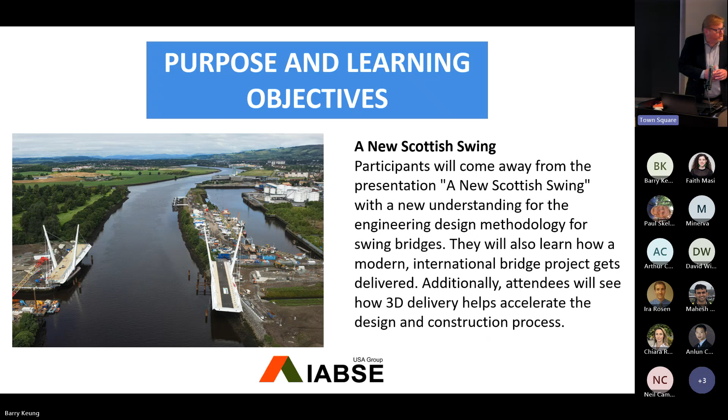Yeah. All right. Thank you, Paul, for the introduction. Welcome, everybody. My name is Barry. I'll be going over the new Renfrew Bridge here. It's set to open end of this year in Scotland, and I'll walk you through all the phases of the project.

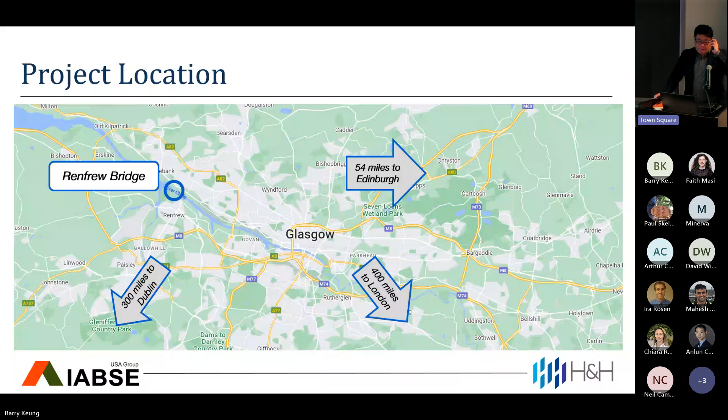So the project location is just west of Glasgow in Scotland. It's about 400 miles to London, 300 miles to Dublin, pretty close to Edinburgh. It's a small little hamlet suburb of Glasgow itself.

This project is part of a larger waterfront renewal, like a lot of new infrastructure projects. So there's roads leading up to the bridge itself, and then housing and redevelopment. Currently, this area of Glasgow is pretty industrial, so with those trades kind of being refreshed to more modern schemes, it's all converted over to housing, kind of expanding the neighborhood of Glasgow itself.

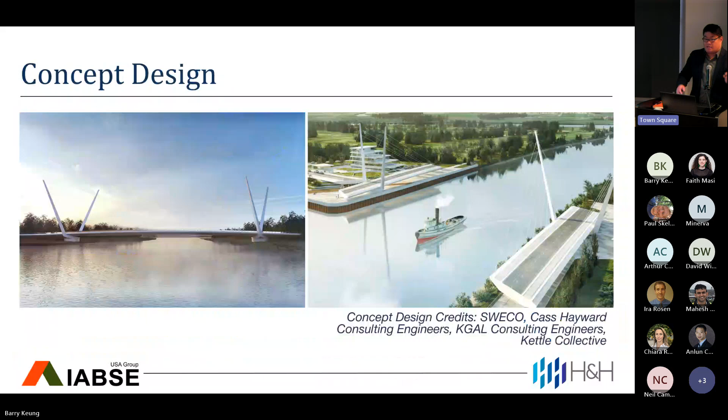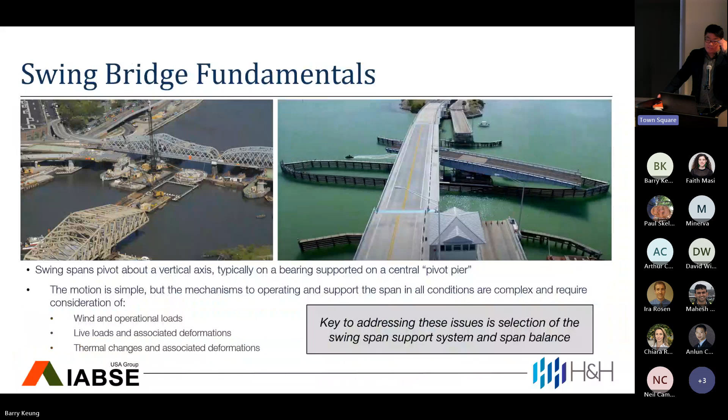Taking a step back, I should describe what a swing bridge actually is. Typically swing bridges are single leaves - a bridge that pivots about a center pier and rotates to allow navigable traffic, then returns itself back to center to allow vehicular traffic. Simple motion, but there are a lot of considerations: wind and operational loads, thermal changes, and things like that. These are all very important factors in determining the support systems for swing bridges.

For our bridge, we doubled everything, so we have a double leaf cable stayed swing bridge. Underneath, we support it under two pivot piers with a slewing bearing. At the abutments, we have end jacks or wedges, and a nose lock which engages the mating span so there's continuous load transfer as you drive over the abutment, over the channel, and back over to the next abutment. A lot of things working in play, but a very complex structure.

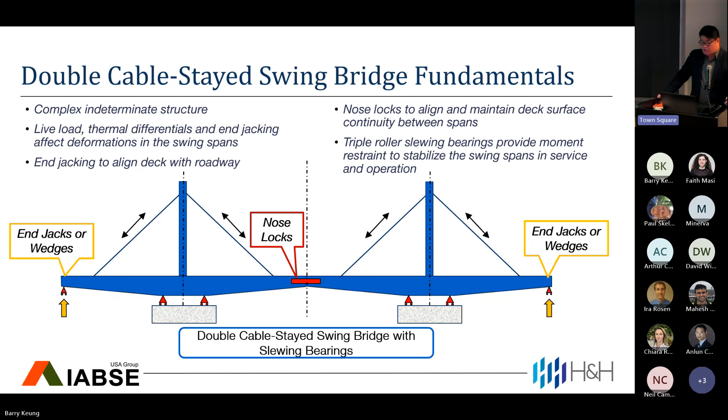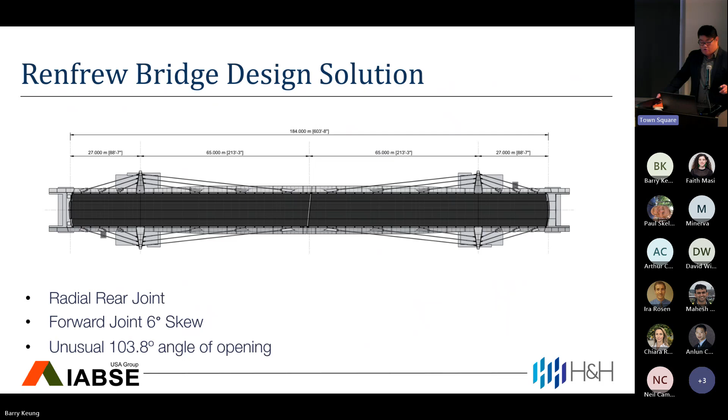Our solution was a value engineering alternative from the original concept design. We reduced the skew of the pylons to just orthogonal - straight 90 degrees with the roadway. We also reduced the toe joint to 6 degrees rather than, I think, 18 degrees originally. That ensured equal loading between the mating girders left and right. We also had a radial joint. With the slight skew at the nose and the radial joint at the rear, we're able to rotate the bridges freely and operate independently. We do have an unusual 103-degree angle of opening, which I'll get into more a little bit later.

So for our superstructure solution, it was a double leaf bobtail cable stay swing bridge. We reduced the number of stays, I believe, from 10 to 6. You can kind of see everything here.

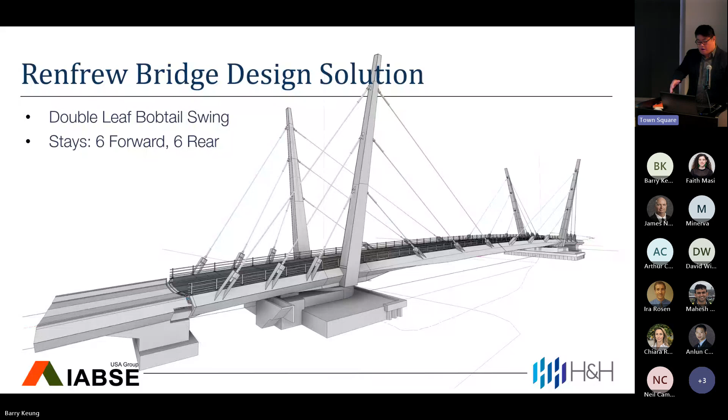Something Paul mentioned earlier is that we designed the entire bridge in 3D. So the renderings you see here are not made just for renderings - they are made for our contract drawings, then rendered for presentations and videos, and sent on to their next life on the contractor's end. This was our engineering model in CAD, which was translated to the owner to make their own renderings. And this is what the bridge looks like this week.

Overall, the design team was led by Graham Constructors, who were the GC. Ramboll Engineers were hired as the approach design engineers for the civil works and substructure. The entire swing span superstructure and machinery was subcontracted out to what we call the HIJV swing span team - a joint venture between Hollandia Infra out of Rotterdam, Holland, and Iemants Smulders, based out of Antwerp, Belgium. Hollandia manufactured the South Leaf, Iemants manufactured the North Leaf, and then they hired us - another JV of us, Hardesty & Hanover, and Roughan & O'Donovan out of Ireland - to design the swing span superstructure and operating machinery.

So a lot of geography at play here: UK, Holland, Belgium, Tampa, Philadelphia, New York, London, Dublin Ireland, and Australia. A lot of moving pieces, so it was very helpful for us to design everything in 3D.

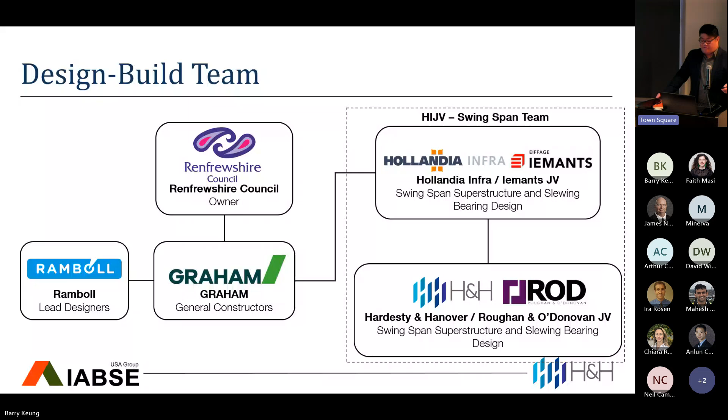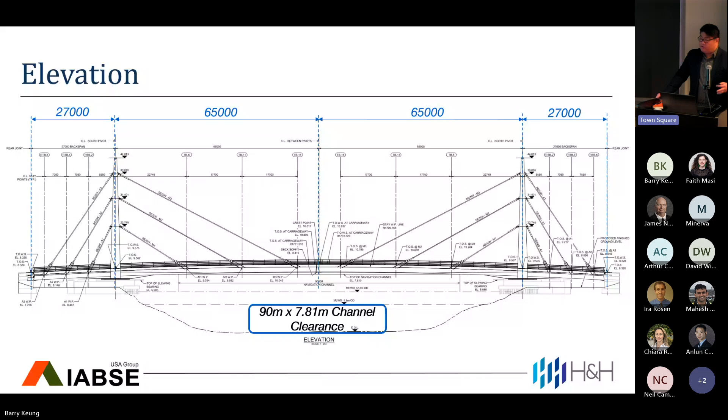This is our bridge typical elevation. We have a 27-meter backspan, 65-meter forward span. When the bridge is closed, it's a 90 by 7-meter navigational clearance. When the bridge is wide open, it's 90 meters by unlimited navigational clearance.

By leveraging cable stay systems and the orthotropic deck, we were able to keep the structure very lightweight, which also meant we could make it very long. That brought more problems we don't normally encounter, such as aeroelastic stability. So this bridge needed wind fairings and drainage - things we don't typically consider when designing a movable bridge.

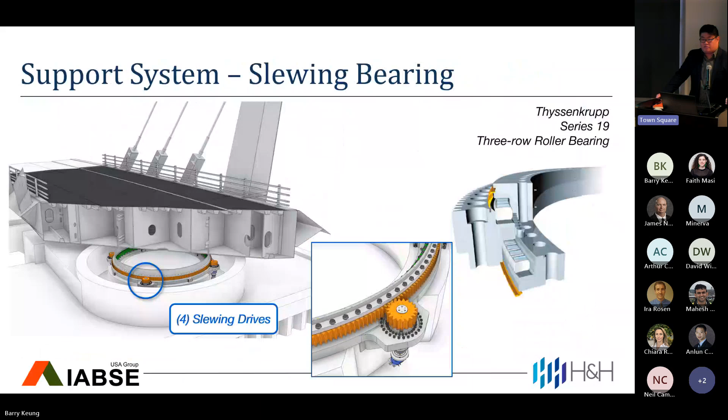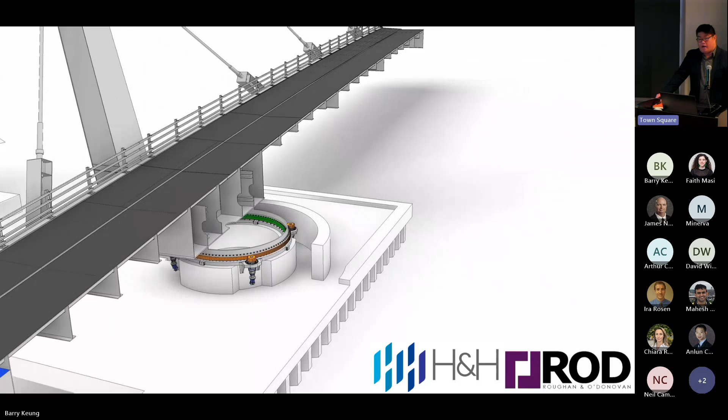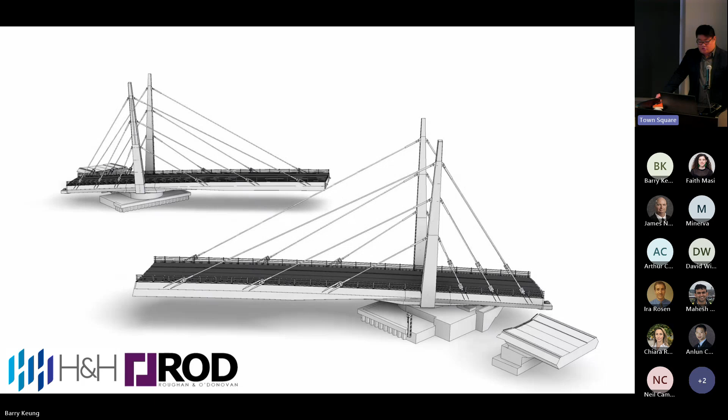This is what the bridge looks like in section, in operation. You can see the slewing bearing is attached to the bridge superstructure itself, split between the fixed part and the moving part. The bridge is actually operated by 4 pinions run by hydraulic motors attached to the pivot pier itself, and they are electronically synchronized in order to operate the bridge. So when everything works right, you've got 2 bridges moving in unison, letting navigable traffic get through.

So for support at the nose and the tail end, we have a nose lock and tail wedges. The nose lock actually retracts and extends in order to engage the mating span. And at the abutment, a tail wedge engages with a receiver on the abutment side to make sure that we have positive contact and load transfer from the substructure to the superstructure.

We'll also notice that the wedge actually provides vertical translation as well, so as we're retracting or extending the wedge, we're lowering the superstructure. This is so that we have proper clearances when we're operating the bridge so that we're not running into any static fixed structure. So this is everything at the rear joint.

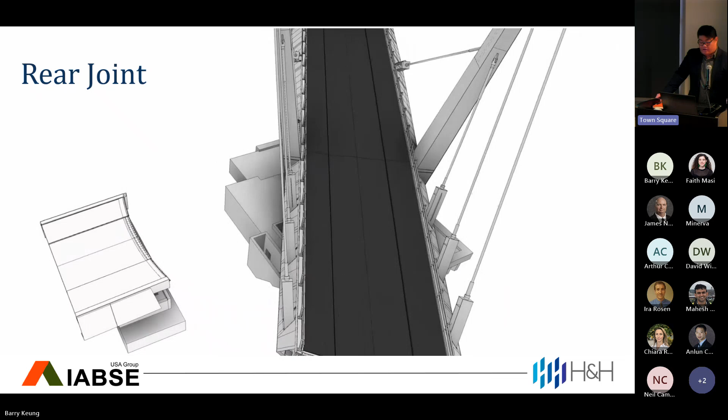There's a lot of staggering and equipment and stuff that we had to coordinate here, so it's very helpful to work in 3D.

Okay, so this is an anecdote time.

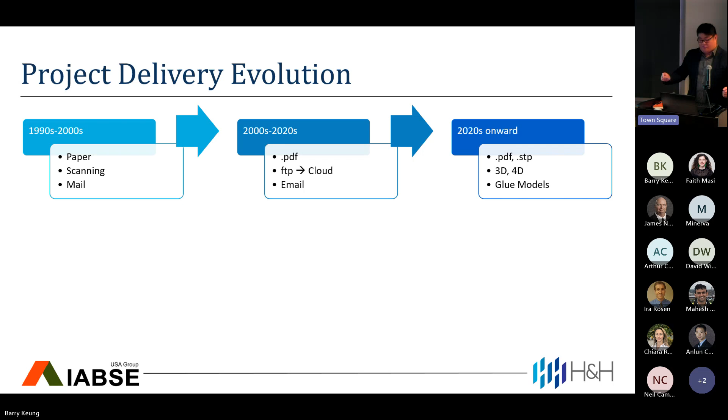When I first started working here, there was a guy who was a year ahead of me. His entire job here was to scan full-size drawings that were 32 inches wide, marked up by another engineer and highlighted in red. So he was supposed to receive those by mail, get them reviewed, scan them for record keeping, log them into Lotus Notes, wrap them all up and package them and physically mail them back to whoever made the shop drawing.

My first job here was on one of New York City's largest movable bridge projects at the time. And we estimated that we were going to get 10,000 shop drawings, and I was going to be the facilitator for that. And I asked, do I need to look for another job? Because there's no way I'm scanning 10,000 shop drawings.

So for that project, it was 2006. We were able to get New York City DOT to accept the electronic delivery of CDs for a bridge in whole. So this is the first real big step of moving into a modern era of delivery. We're able to use email. At the time, we loved email, not so much now.

FTPs and PDFs to submit all the shop drawings. And since then, the delivery hasn't evolved that much. We have cloud systems, email's gotten worse. Things got more expensive, but pretty much there hasn't been much evolution in those 20 years since then.

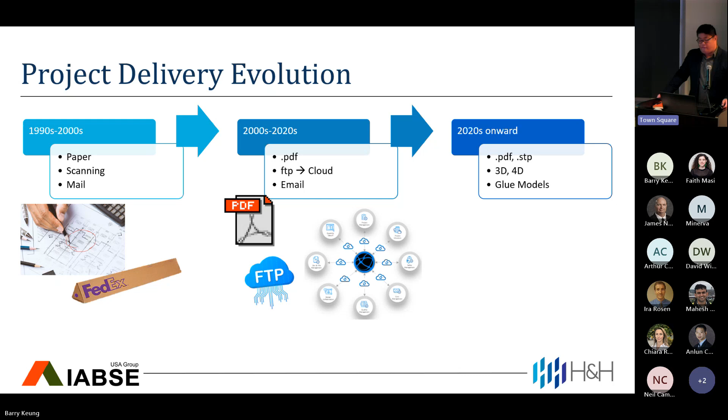Starting in the last 5 years, we've kind of stepped it up a lot. PDFs are still our contract deliverable, but to make those PDFs, we're making 3D models, and we're actually submitting agnostic step files as well, in order to make sure that there's additional information. We're still...

obligated for all the information that is on the 2D contract drawings. The 3D drawings are submitted as a sort of design assist for translating information. It cuts out a lot of RFIs, miscommunication, things like that. And since this was a design build project, it actually helped with execution a lot.

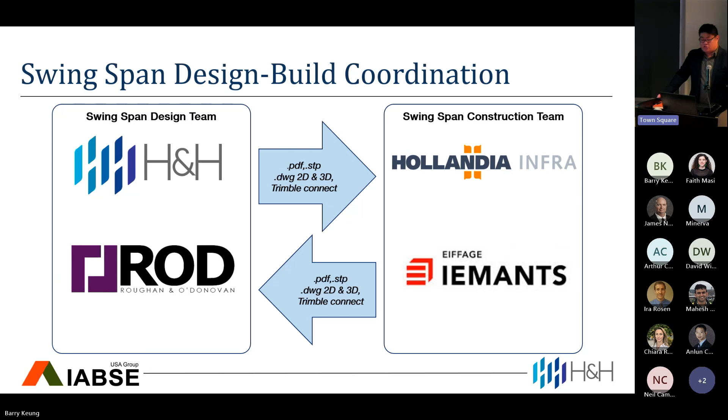So this is the coordination within the Swingspan design team. We submitted our drawings, step files, traditional AutoCAD 2D and 3D, and Trimble Connect, which is a web-based viewer for 3D models. That was submitted to the contractor. The contractor was able to digest that, send back information in a similar fashion so we can kind of coordinate everything.

So the big benefit of doing all of this is that once we were at 60 to 70%, we could submit the models to the contractor and they can make their prefabrication method statements. So they can start in earnest figuring out how they want to fabricate the bridge before we were done with final engineering, which saved on a lot of rework.

They did so much work in 3D that we were able to make sure that the manholes and conduits were bent to the right dimensions before we even delivered the bridge at all. So all of this bending that you see here was included in the 3D model that the fabricator was creating.

This is very important because on orthotropic decks, there's a lot of hotspots, very controlled geometry based on the Eurocode. So it's important that we were able to translate all of that. So the contractor, all this process greatly reduced the amount of traditional time that we have for shop drawing checks, since we're basically making our drawings from the same 3D model.

Also, the cable stay geometry is very complicated and very difficult to digest in a 2D drawing. You can see here, we have a lot of the different angles and coordinates laid out in isometric and plain 2D, and it does get very complicated.

And because we were so concerned about secondary effects within the tie plates at the pylon, it's very helpful for us to actually have a 3D model to send over to the contractor to make sure that we were both understanding the geometry as it was intended.

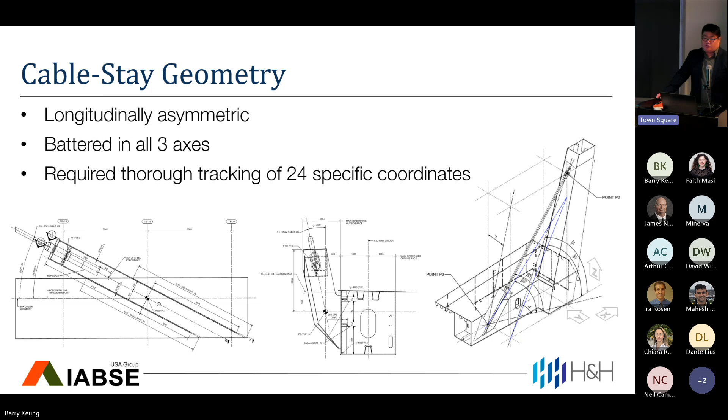Additionally, the contractor was able to do all of their work plans in 3D using our model. Originally we had double fillet welds for welding the superstructure for the pylon. At the lower portions there was enough accessibility for welders to get in and do the internal double fillet welds. Once we get up to the green and blue section up top, it gets really tight and they weren't able to get anybody in there, so we had to redesign some of those areas to partial penetration welds just to facilitate fabrication.

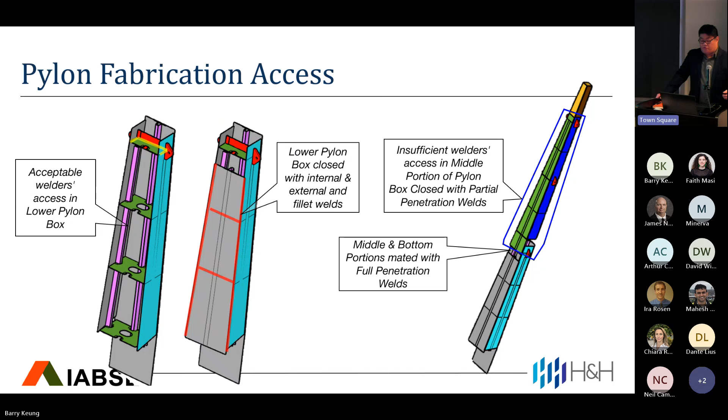But we were able to catch that very early on because everyone was digesting a 3D model. So this is some shots of the fabrication there. You can see there's a guy further back in the pylon, a lot of access there, but it does get very tight as we get closer to the top.

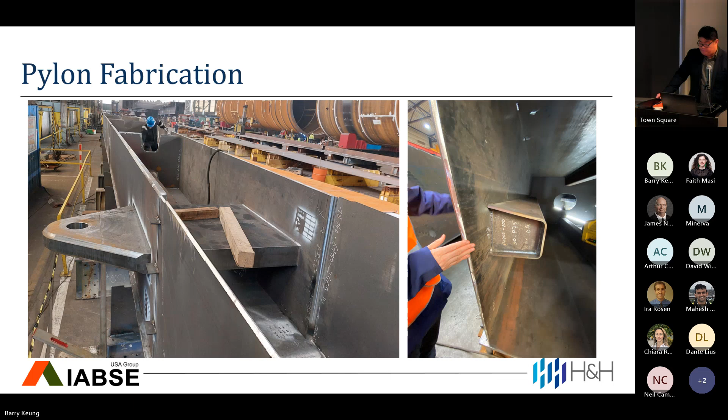Another important part of doing a cable stay bridge and a bridge this long is that we're very concerned with deflections. Traditionally on a bridge here in the States, things are bolted, so you have some slop in connections to do final alignment of superstructure and machinery. This, because everything was done offsite, we don't have that many chances because everything is welded. You kind of have to take it how it is.

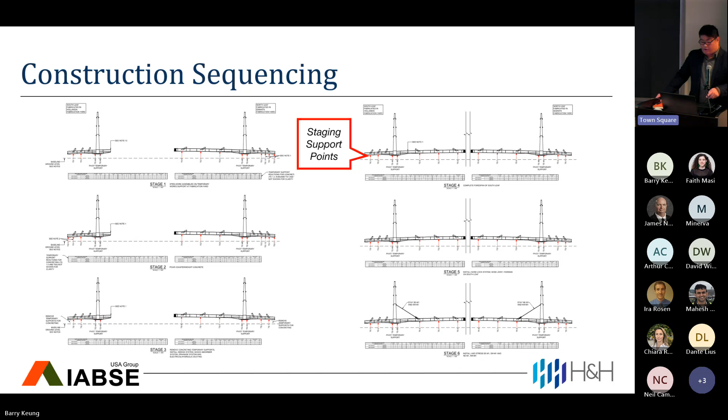But that's where the beauty of having a cable stay system comes into play, because we have such a light, flexible structure, we can actually toy with the final deflections as we are erecting the bridge. So we did construction sequencing design, made sure we had load cells under all these points here in red, and we were able to model the predicted deflections of all the super cable stay strands as they were being attached and tensioned.

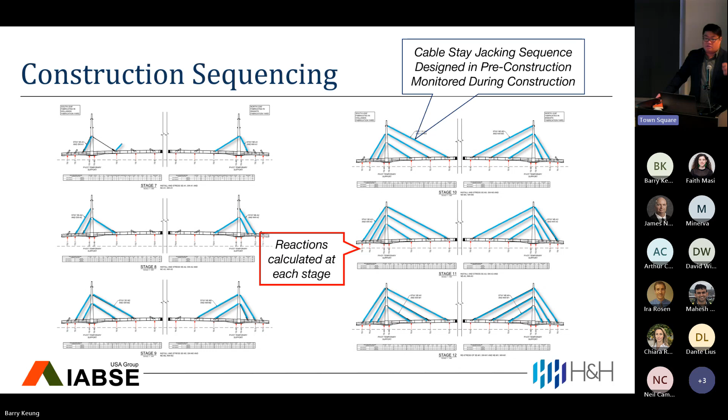It's important with cable stay design that you can add tension, but it's not really good to relieve tension. You can see here where the jacking occurs for the strands. A hollow jack will pull the strands, a conical restrainer will bite on the strands to make sure that tension is locked in. But because that biting deforms the actual cable itself, if we were to back off and relieve the tension, that bitten area has now damaged the strands and is a fatigue hotspot induced area on the cable strand.

So it's very important that you only go forward, you can't go backwards, which is why we did so much planning ahead of time.

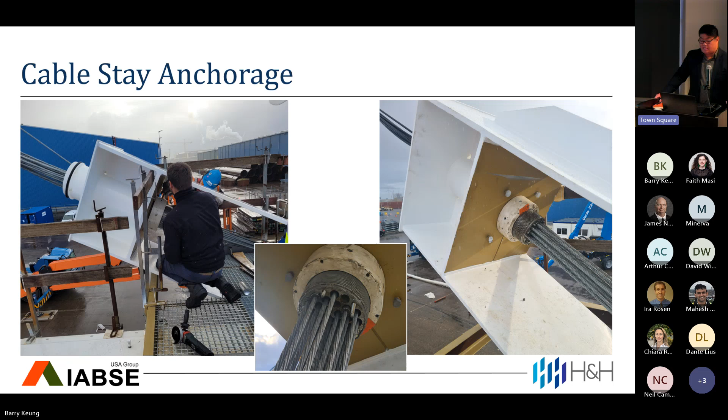So this is the cable stay clevis that attaches to the pylon up top. Very big equipment.

That man's hand is enormous in real life, but it's about 3 feet. No, I'm just kidding. Very big equipment all the way up top.

So it's very important that we have everything planned out and coordinated as well.

Geographically, the bridge was pretty difficult to execute. The North Leaf was manufactured in Belgium and then shipped in parts to Vlissingen, Netherlands for final shipping on a barge to Scotland.

The South Leaf has most of the machinery, all the nose lock machinery and the movable joint machinery, on the south span. So it's actually very heavy, and that is coming from Rotterdam, Netherlands. All of that gets on a one-week journey from Belgium and Netherlands out to Scotland, about 1,000 miles by sea.

For large sub-assemblies and major assemblies of the superstructure, they're transported around the fabrication yards by SPMTs. It's pretty traditional, you guys have seen this in a lot of projects.

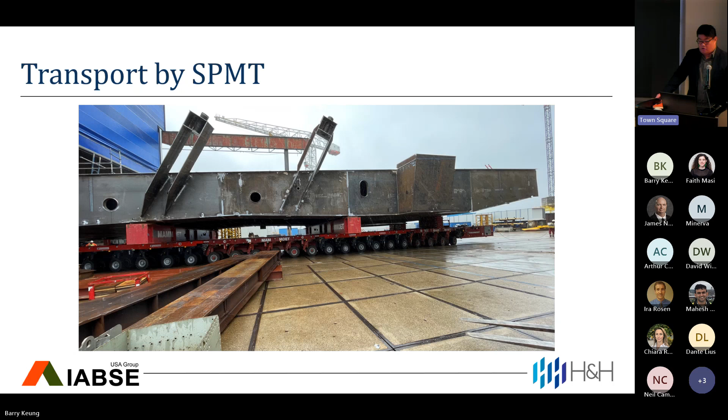Some required special transport engineering outside of the traditional SPMTs. This is Alex Van Loon, a project engineer with Hollandia Infra out of Rotterdam. He is using the 3D model we developed that we translated over to his Tekla model for final camber and fabrication, using that digital twin to make the digital twin for the transport engineering.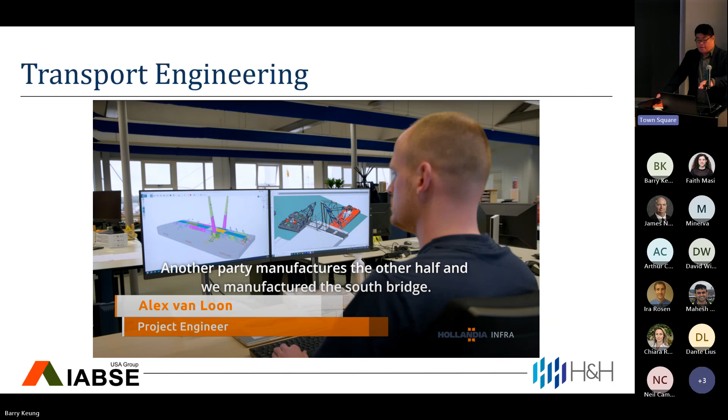So the image on the right is actually the bridge getting modeled for final transport delivery. You can see that closely here.

At Rotterdam, the quay wall that supports the fabrication yard could not withstand the ground surcharge from rolling an SPMT over it with our bridge. So in that instance, even as lightweight as the bridge is, we needed to employ 3 marine cranes in order to lift the bridge so it could be moved safely to a barge. The Matador 3 here in red is the 3rd largest marine crane in Europe.

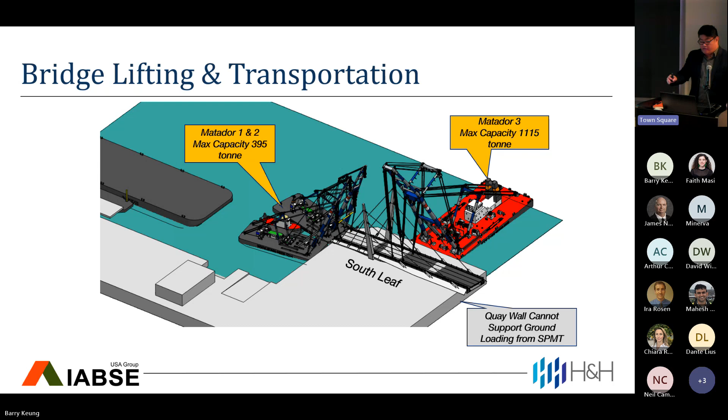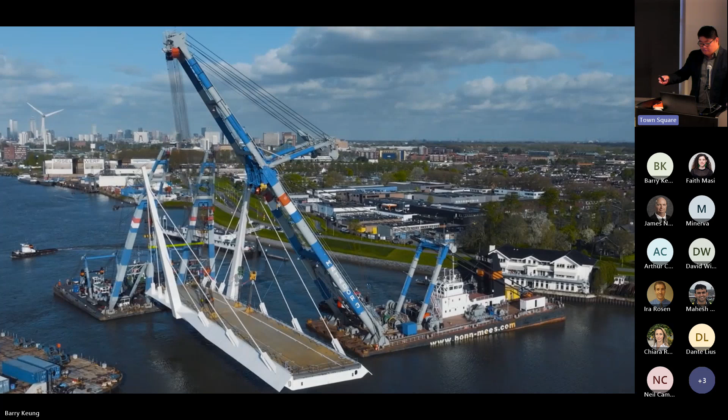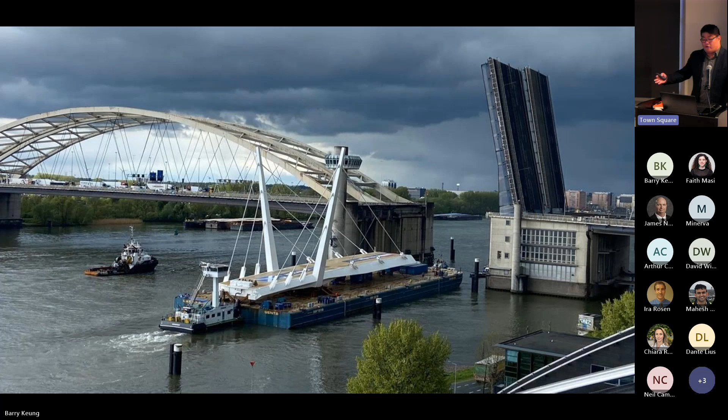But that all went out great, got it onto a barge so it could get floated out to sea. This is the bridge making its final departure from Rotterdam using another movable bridge on its way to its final home. So those are some pics of the bridge making its way out in the open sea to Scotland.

So this process does take a while, but it is faster in this video. Ideally what happens, all the barges come in, roll the leaf off with SPMTs onto the pivot piers. Once we're on the pivot piers, we're on the slewing bearing. The bridge superstructure gets fastened to the slewing bearing itself, and we're able to do the final connections.

Prior to this, all machinery and electrical equipment have been installed and tested on the bridge pretty much to 99%. So there's very little work for final movable bridge tie-in of the superstructure at the very end. This did save a lot of time in construction. We could do a lot of work concurrently.

So once the two bridges are on their pivot piers, we just need to rotate them in place with the machinery that we designed. And this is what the bridge looks like two weeks ago. This was from earlier this week. Going through final testing right now for mechanical functions.

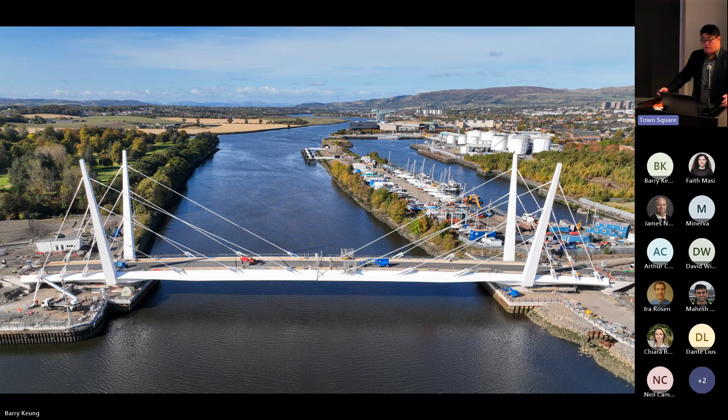More testing as well. You'll see here, final work getting done. All the tie-in work did have to wait for the bridge. Final concrete pours for the abutment, deck joints and stuff like that needed to happen after delivery. But by and large, compared to a traditional bridge project, it did go much, much faster.

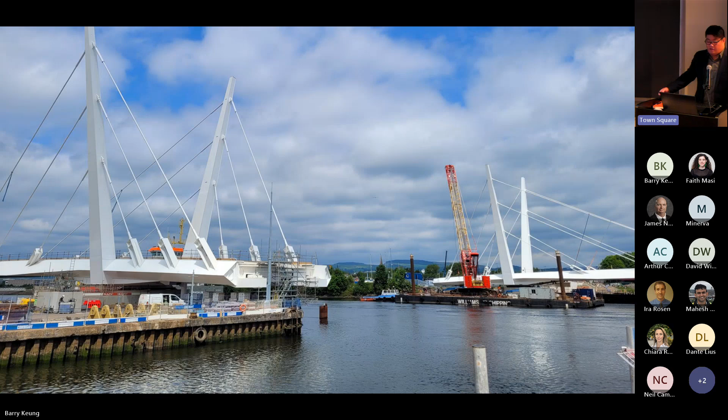So in summary, we had a bespoke design to address the site constraints and owner requirements. Our orthotropic deck and cable stay system reduced the overall weight of the bridge. 3D delivery helped a lot with progress. And by focusing on prefabrication, we were able to expedite the construction schedule and increase safety.

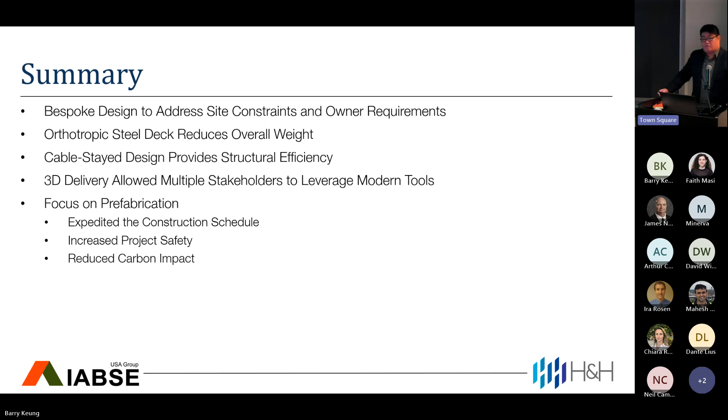A lot of work was able to be done off project sites in the fabrication yards. We also reduced the carbon impact because we're not moving in a bunch of diesel generators to get everything done. So currently, the project is set to open to traffic by the end of the year, 2024.

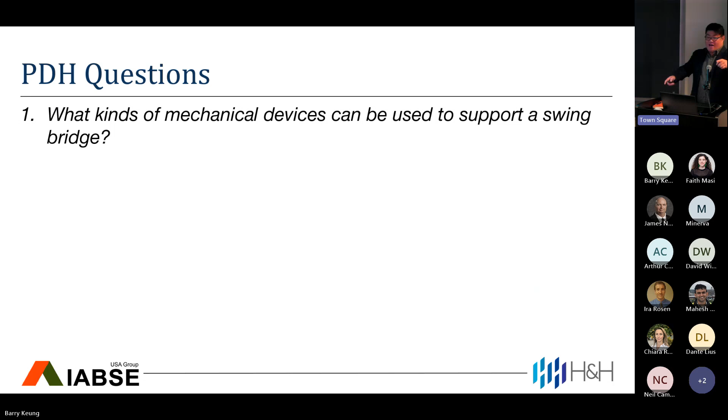What kind of mechanical devices can be used to support a swing span bridge? Anyone? Just yell it out. Nose lock. Wedge. Slewing bearing, great. You got all of them. You didn't even need my help.

True or false? Each leaf of the Renfrew Bridge can be operated independently. Great.

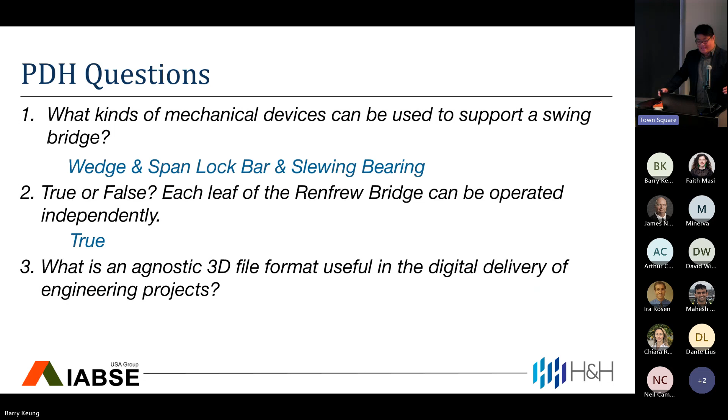And what is an agnostic 3D file format used in the digital delivery of engineering projects? STEP.

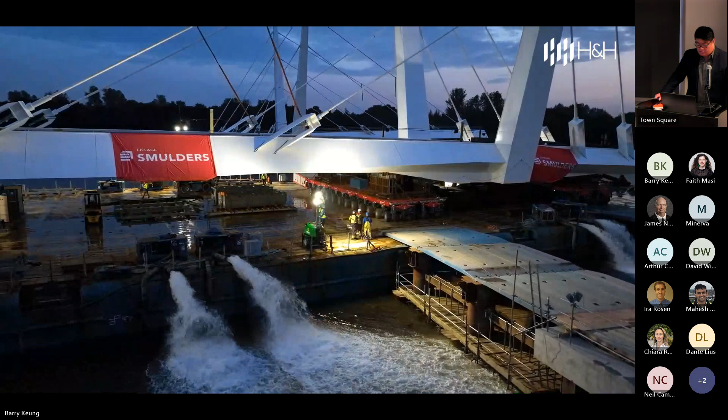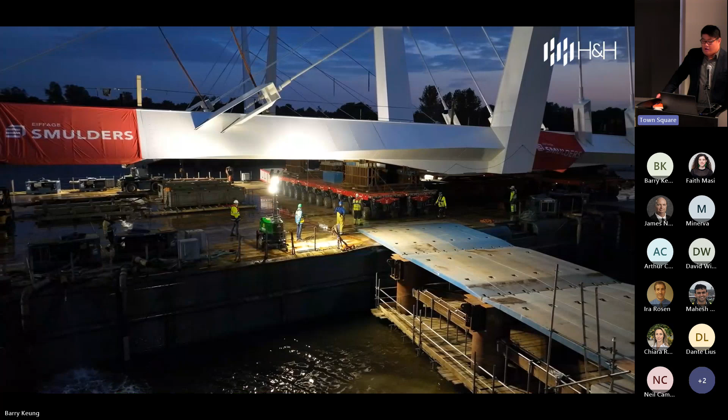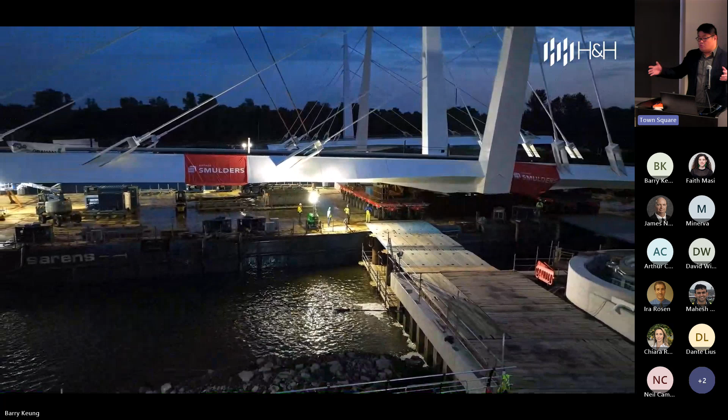So the time never really governs the typology of the movable bridge. For the most part, it is elevation of the superstructure, navigable channel clearance, and then substructure constraints, like is the water level too high, things like that. So this was selected because the owners wanted an unlimited vertical clearance for navigable channels. So there's really either a swing or bascule that would have worked here.

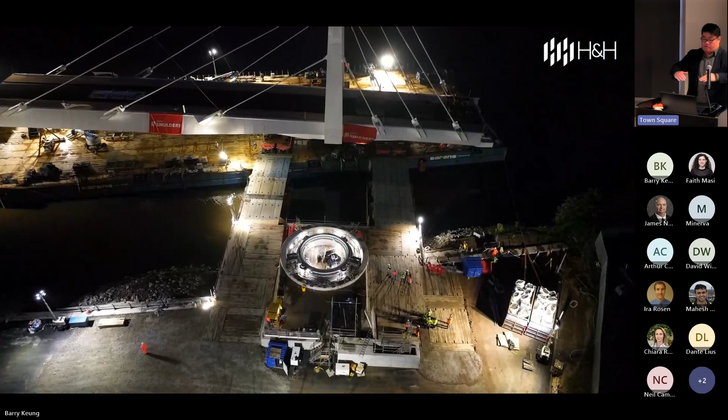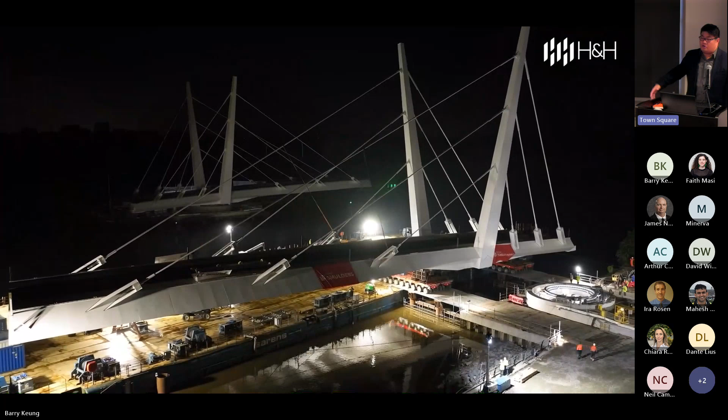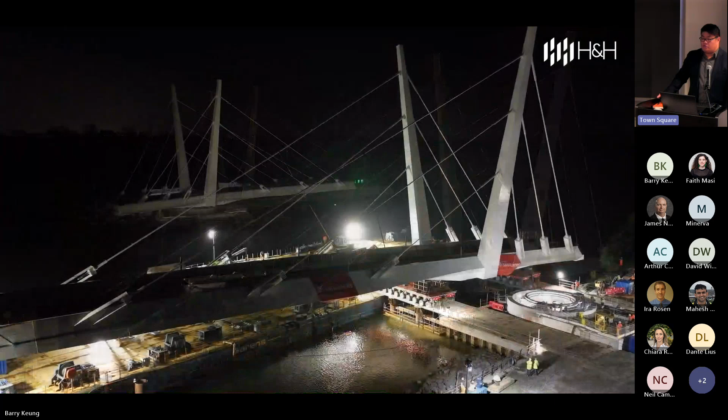And then, especially nowadays, substructure work has become very expensive. So if we did have a bascule, we'd need to increase the amount of size for the substructure as well. And we also needed, it was helpful to utilize a cable stay system because the span itself is actually very long compared to a lot of traditional movable bridges. So swing span really was the only option at that point.

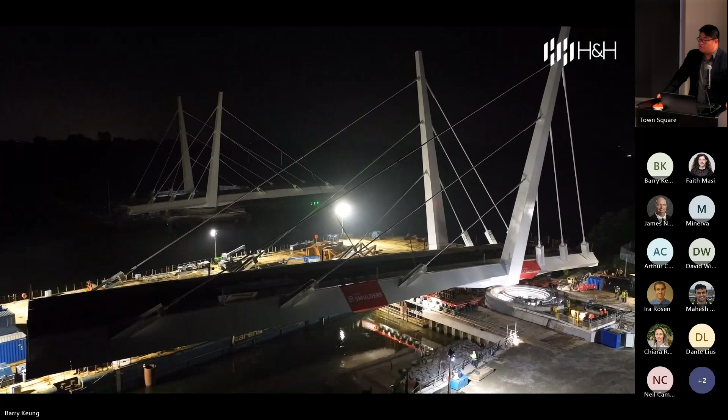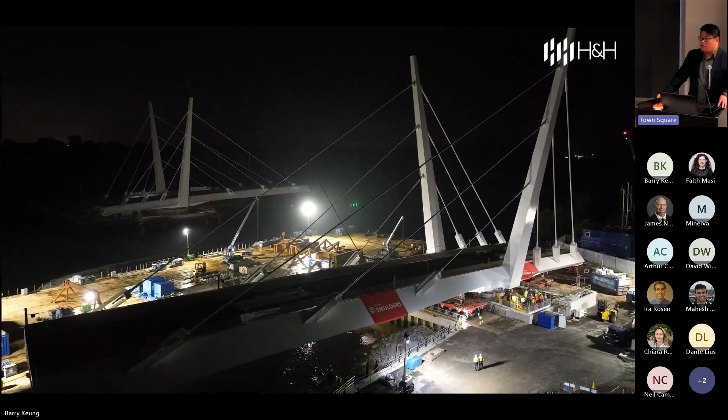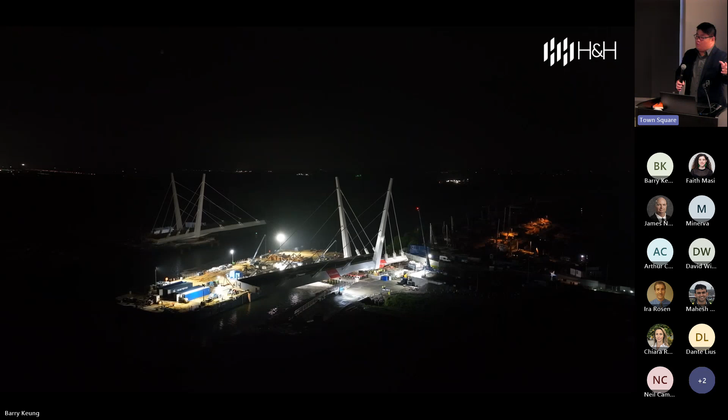The question was, what software do we use for the design of the process? We ran our CAD model out of Autodesk Inventor. Our design models were made out of Midas, and then local models were split out from that for analysis. FEA hotspots and things like that were using Ansys. But our CAD model was done primarily in Autodesk Inventor, and our 2D drawings for our contract drawing deliverables were entirely derived from that model.

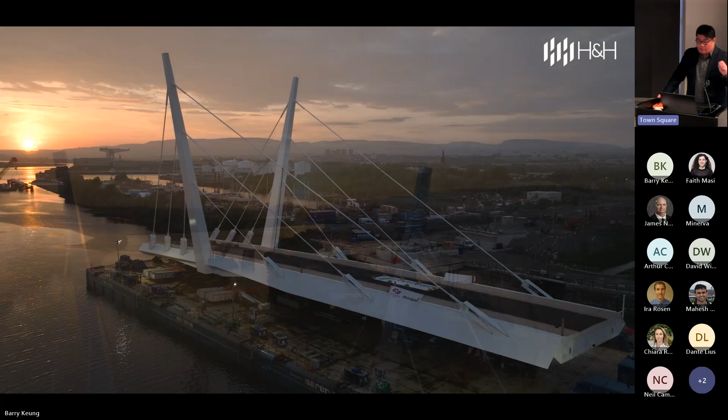I see. So I saw a counterweight, a concrete counterweight. What was the size of that, and how was that secured to the bridge? Everything's in metric, so you're gonna have to excuse me.

So the counterweight width was coast to coast with the main girders, so about 7 to 8 meters wide, and then it was 3 bays of floor beams deep, and then the full height of the floor beam. Whatever that is in metric, I don't know what it is in English, but pretty much the last half of the tailspan itself was filled with counterweight.

The main girders in some of the areas did have a counterweight topping at the bottom just because we needed some extra weight, but we used a little bit of steel ballast and heavyweight concrete to achieve everything, really just making sure we had everything in a tight and efficient spot because there's no room. If we did everything in lightweight counterweight, the CG would not have made it to where we wanted it to be.

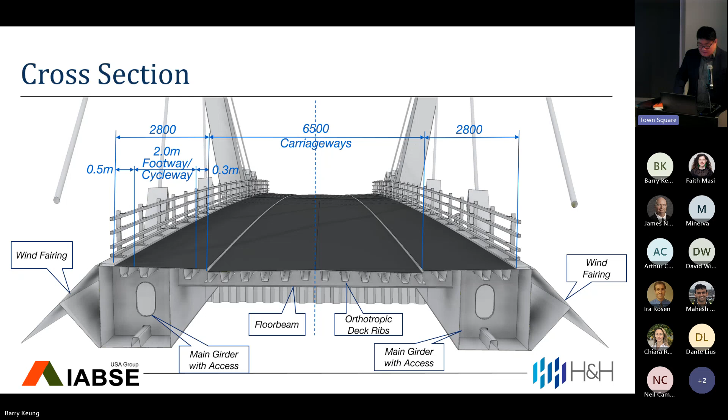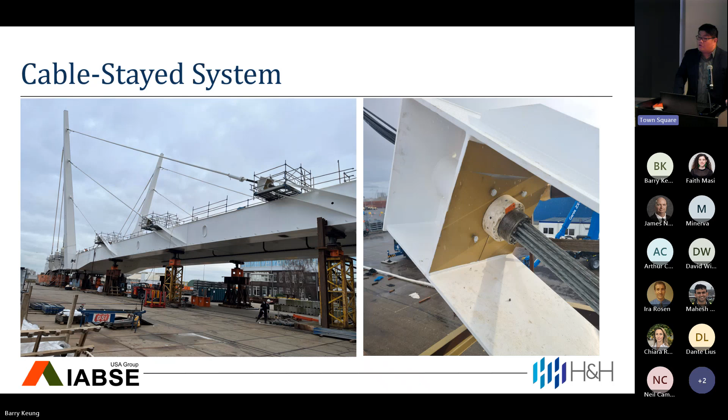Can you tell us a little bit about the joint detail in the middle of the bridge? The reason I'm asking is there will be some tower leg movement - in the same position it will move longitudinally in the opposite direction, which is going to bring the girders back up and down, which is going to cause some kind of torsion. If two towers are moving out of phase, there will be a big clashing between two edge girders, so I'm not sure how you deal with that.

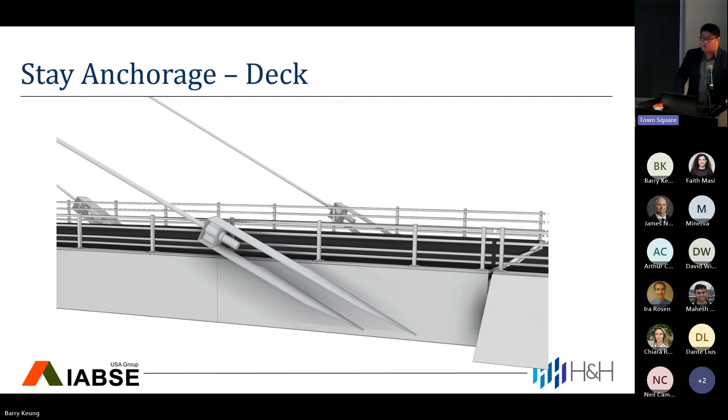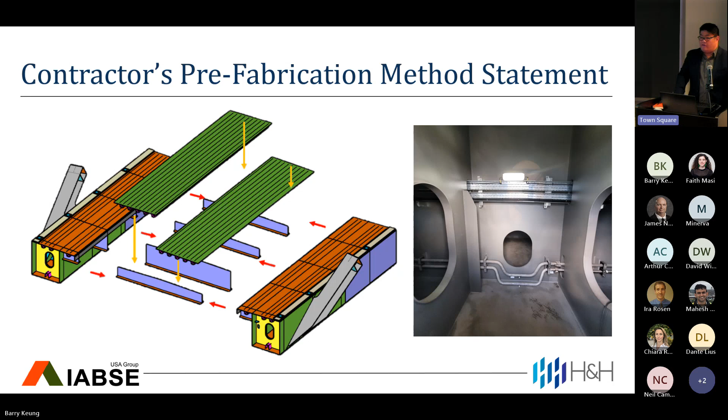Can we take one at a time? You were asking about the nose joint. So the joint in the middle, given that we will see some tower leg movement back and forth which will bring the girder up and down - if the movements are out of phase, the two bridges from two sides will be fighting each other. Yeah, so that happens in a lot of twin leafs as well. So I guess to the first part, about the nose joint - the nose joint was designed and manufactured by Maurer in Germany.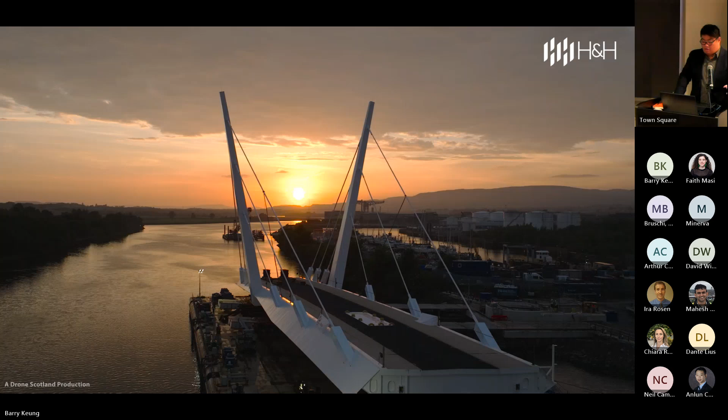When we operate the bridge, we actually operate the nose joint first. We retract the joint from the south span in towards the south pivot pier itself, giving us the gap that we designed for movement at the deck level.

And then we run the span locks and the wedges. The span locks themselves give structural continuity between one span and the next. So if there was a wind deflection or anything that would move one structure versus another, there's nothing out of phase—there's structural continuity from one span to the other. So the span locks take care of all of that.

The span locks are actually also tapered as well, so if there's some misalignment as the span lock is actuating into its receiver, it will move the span the last couple millimeters to make sure we're locked in. All of that was baked into the design and shimmable in case we got to the field and things were a little bit off from what we designed.

Thank you very much. We have questions online. From Dante: do you foresee cable tensioning adjustment during service? What is the service life of the bridge?

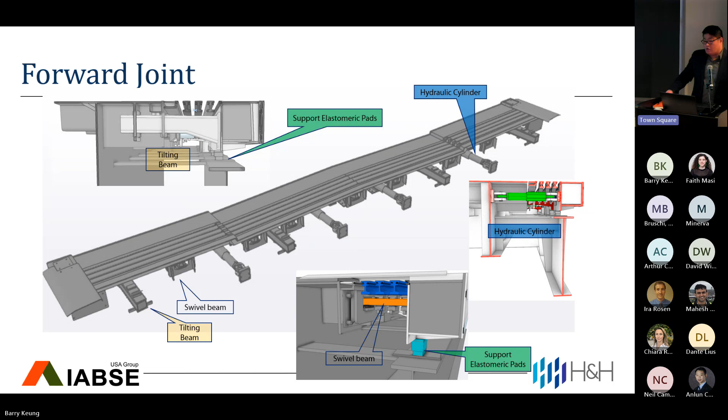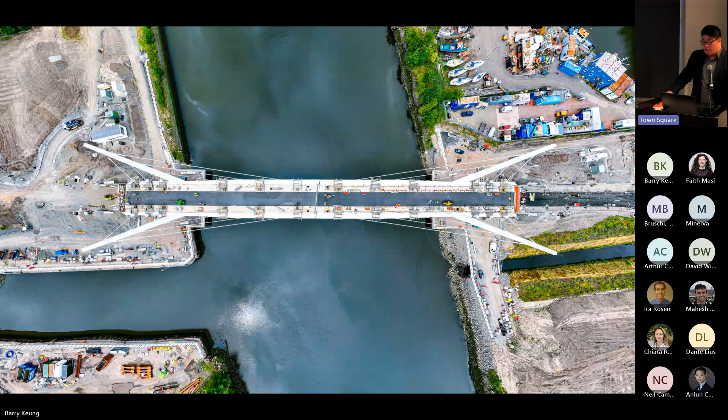It is. We had a whole other presentation about the wind fairing, which gets into the aeroelastic results of it. Something I hadn't really considered—we don't normally consider wind fairings in design of movable bridges because they're so short. But since this is long for a movable bridge, we did have to consider it.

We found that the overhang actually shed the wind underneath the span and was able to deflect all of the wind so that there were no negative vortices underneath the area between the main girders and the orthotropic deck. So we did play around with that angle—I believe we're at 45 degrees.

In the interest of economy and keeping the steel wind fairing smaller, we tried 30 degrees and 15. Those all induced vortices underneath the deck level, the deck area. 45 turned out to be the perfect spot for us, and that's kind of why the shape is like that.

And because the overhang area is so low and the bridge itself is so low to the ground, there weren't any uplift or negative vortices in that overhang area from the wind fairing study.

Okay, and my other question is regarding seismic. I know Scotland is not very seismic, but let's say you have this bridge in California—what would you change in the design? Like, for example, the expansion joint in the middle—could you have two structures colliding?

Yeah, it's a very interesting question. We are working on a job in Portland right now with the same seismic considerations. I guess the answer is you'd have to engineer for everything—that's what they pay us for. There's no one solution that will keep everybody happy. There are limitations, like financial limitations, site limitations, and things like that. So I can't say offhand what we would change without really knowing the site class criteria, things like that. But seismic is definitely a concern for movable bridges, though I think it's site specific for each case.

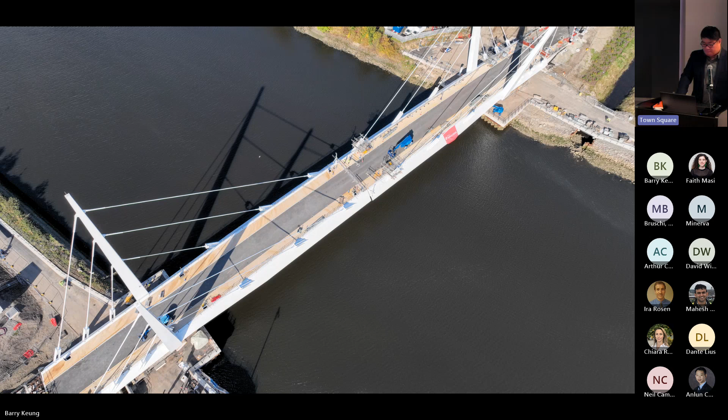You can see here at the bottom right, at the pier, when the bridge is open it actually has a second lock bar, a vertical lock bar, to engage the receiver there to make sure the bridge is fastened down. I think in general the bridge is much more stable in that position comparatively. I'm not sure if wind tunnel studies were done for that specifically, but it's less of a concern than in the closed position. Thanks.